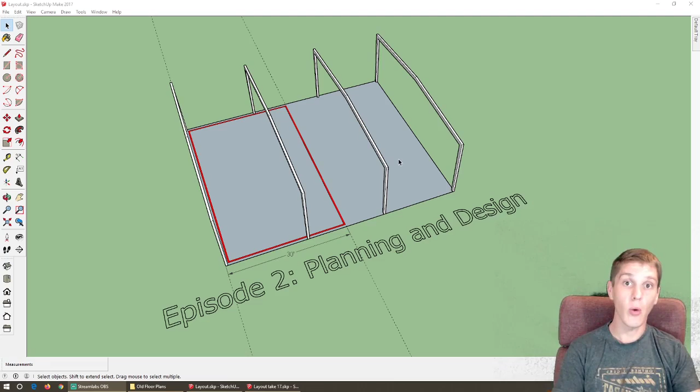That 30-foot width for the hangar becomes important too. I looked at a table of commercially available small planes. For our building, a 50-foot wide building, we are going to put a 42-foot wide hangar door. For a list of planes that would fit in a 42-foot wingspan, the 30-foot depth is big enough for most planes. But we didn't want to get any shorter than 30 feet on the hangar side, because for resale value, the hangar is no longer usable for most people that want to put planes in it. So we had to keep that 30 feet at a minimum for the hangar side.

So what you see here in front of you is our basic building restrictions. We have a 50 by 60 metal building, and inside in red is essentially the exterior walls as I will frame them up inside the building.

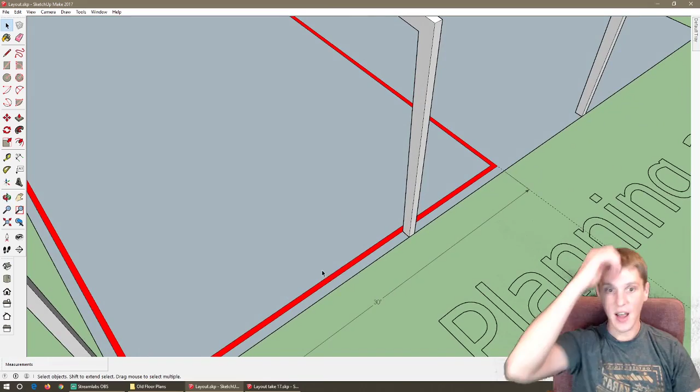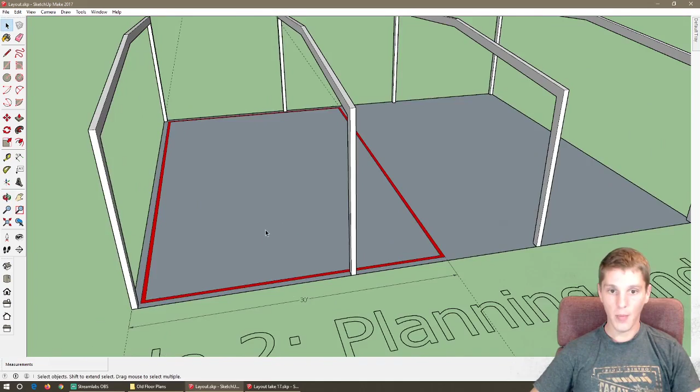Talking to the builder and seeing the designs for the metal building, we need to offset the walls 8 inches from the exterior walls, because that's the depth of the girts. These cartoons of the main columns are not actually to size—they're just there to help you visualize the overall shape of the building. But we can get up to 8 inches from the exterior walls where there are just girts running between these two columns. Now, where these columns are on the wall, I'll end up having to box around them.

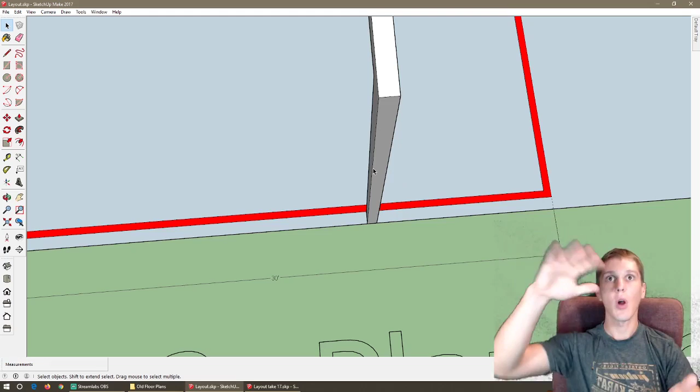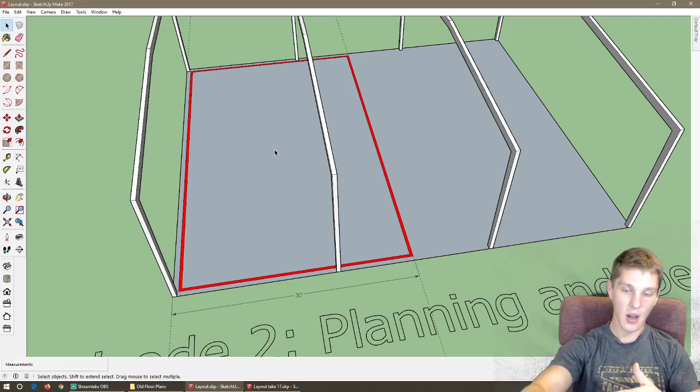With the framing, we'll have to frame in and sheetrock a box to hide that column. I don't show that on any of the plans, but I won't know exactly how big I have to make that box till I'm actually framing in the house, and I can see how far that column extends past my exterior studs as I run them around the outside of that wall.

But anyways, this is the starting point for where we came up with floor plans. Everything had to fit within this red box for us to have a house. So from here, I'm going to roll through some of the floor plans.

I want you to know that the first floor plans I'm going to show you, and I'm going to buzz through them pretty quick, look nothing like the finalized floor plan that we chose. We went through probably 20 different iterations of floor plans, off very wildly different concepts, that evolved as we figured out what we wanted and what we could and could not do.

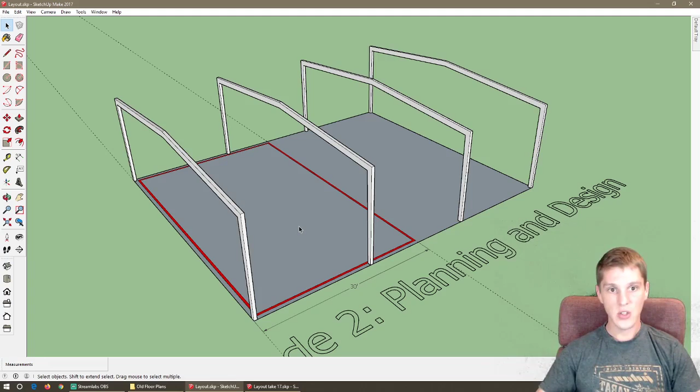So there's a lot of restrictions as far as what I can build, and then there are restrictions for what we wanted out of our house. So I'll walk you through what we did, and I'll show you what we came up with.

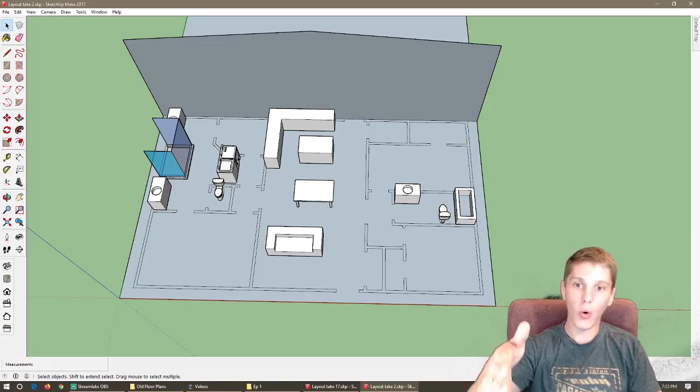Here you can see we finally started trying to visualize what it would look like with these main columns. We were fairly certain this was the layout we were going to go with for a long time. We really were happy with the whole master suite, the walk-through bathroom into the closet with the utility room back here. We thought this was going to be it.

Until at one point we went into our backyard with a 100-foot measuring tape, some spray paint, and some flags, and I actually drew this floor plan out in the lawn and let my wife walk through the house. We came to find that the living space and kitchen was not big enough—there wasn't enough room for the living room, dining room, and kitchen all in that central third of the house.

That's something I'd like to pass on to people doing their own floor plans: you have other options to visualize it. It's easy to sit at a computer and not get a good sense of scale. Going to a park with some flags, or laying the floor plan out in your backyard and walking through it, really helps you visualize how big the house is going to be.

So we were 100% certain for probably a week that this was the floor plan. We were going to do this, but then we actually laid it out on the ground and decided it wasn't big enough, so we decided to try and expand the living space.

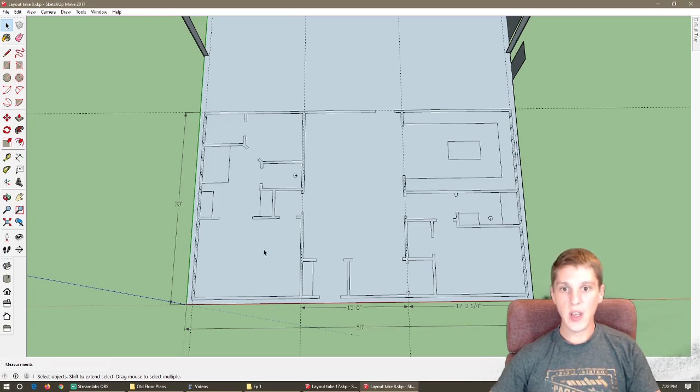So then we decided to enter into the living area so we could have this bedroom here with a kind of cutout. My wife wants a built-in desk, study nook, or office area somewhere in the house, so we did something like that here, keeping this master suite the same as before, with the same U-shaped kitchen layout.

Then finally we had a big brain flash and thought, why do we have to enter from the end wall of the house? If we enter from the side wall instead, we can essentially cut the house in half, with less than 16 feet spanning each way. That makes it real easy to run floor joists for the second floor—they just go all the way across.

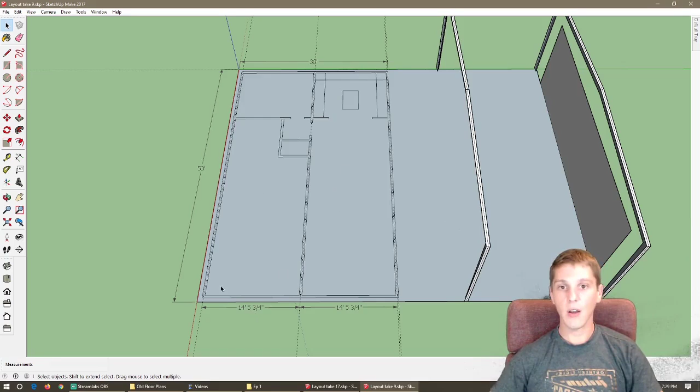We can have this entire area be the living room with the kitchen in the back, and then just carve up this area into 2 bedrooms and 2 bathrooms. Another attempt had this long skinny layout, walking into a large living room with a hallway accessing kitchens, bedrooms, and bathrooms. This ended up not working out—you lose too much square footage to a hallway, so it wasn't an efficient use of space.

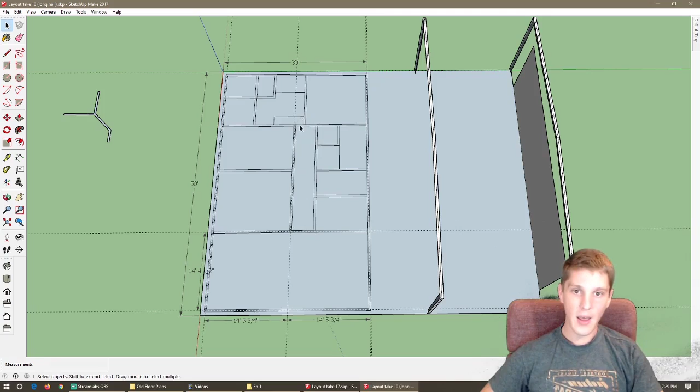This layout was our first attempt at carving this half up, and we refined that idea a little bit.

We moved the bedrooms down here on either side so they could share a hallway and save some space. We changed our mind for a bit, went back to the old way of entering in the end wall, cutting in the kitchen here off the living room. So we tried to tweak this a little more to make sure entering this way was what we wanted, or if entering the other way was what we wanted.

The one thing I did like about this layout was you have some separation between the bedrooms so you don't interfere with each other if you have people coming over. It's just me and my wife, we don't have kids, so this bedroom would end up being her office most of the time because I have an office here. But I did like that.

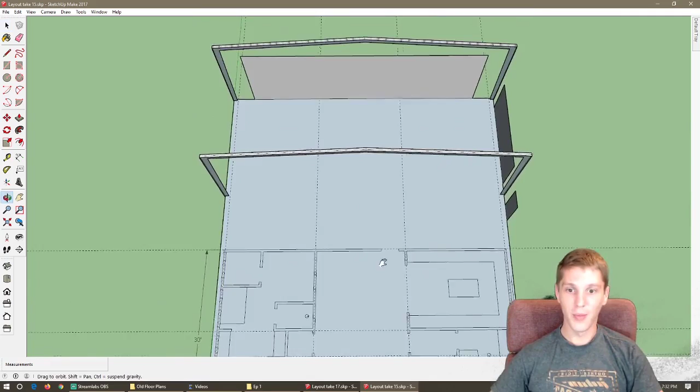We really started tweaking this, and we're getting a lot closer here to where we ended up finally landing. Living space, dining room area all the way through here, and you have your full kitchen in the back, U-shaped counters all the way around, island in the middle.

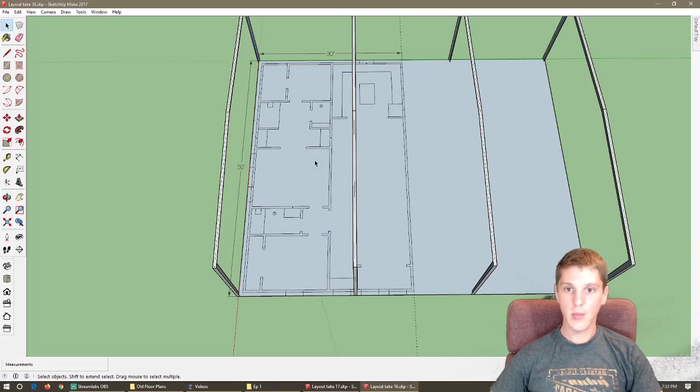You have kind of a shared hallway where you go into a guest bedroom, master bedroom, and for a long time we thought this was it. This was exactly how it was going to be, 100%.

I drew up plumbing diagrams, framing diagrams, sent plumbing diagrams to the builder, and the last thing we did, we made a couple little tweaks like you always will. The only major change we did is we made the walk-in closet on the other side of the master bathroom smaller, and we added a closet here to have a separate his and her closet, and to give some separation from the master bedroom and the guest bathroom. So that was the only real change.

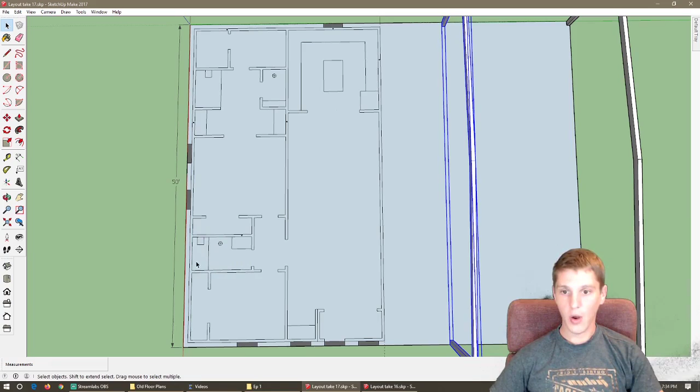Since then, only minor changes have been made to this layout. We've mirrored this bathroom so that the vanity, toilet, and bathtub all drain on this side, and we did that for HVAC reasons - we'll talk about the HVAC here in a second. But this is essentially the layout we have landed on. Okay, so I know I burned through those pretty quick, but you got to realize that as I was making all those floor plans, you constantly have to be thinking about the next step in the build.

You can't just be drawing pictures on a flat sheet of paper. You need to be thinking about how that's going to translate for framing it in, how it's going to translate for your plumbing, running your waste and your plumbing supply, how you're going to run your electrical. Electrical is generally pretty straightforward, but you need to be thinking about these kinds of things beforehand.

One of the major problems we had to think about was the plumbing waste and vent lines, the vent lines primarily, and the HVAC. Now, the major concern I have for the vent lines and HVAC is they usually get run up for a single story home, up into the attic where the vent lines all tie into a main stack, and the main stack runs at the top of your house. The HVAC has all your ductwork that distributes air from a central AC system throughout the house.

Now, we wanted to be able to add a second floor to the house at some time, so I wanted to be able to fit all my utilities within the floor joists of the second floor. So a lot of this, when we were talking about floor plans, we were constantly thinking about what things would look like in the future.

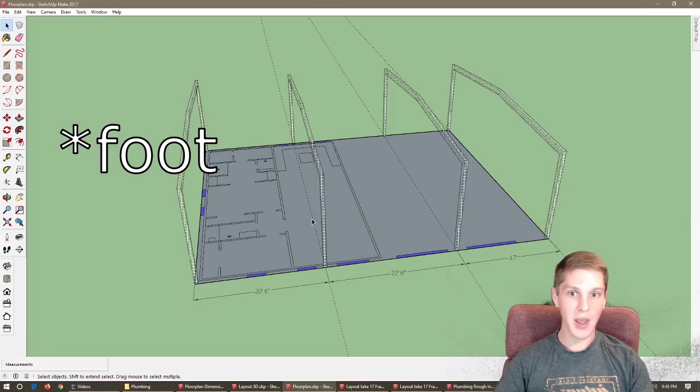So I mentioned it briefly - a big thing you need to be thinking about is your joist spans for when you put your second floor on. With a 2x12, generally a 16-foot span is about as far as you want to take it. You can go a little further if you put them on tighter centers than 16-inch centers, but generally about a 16-foot span. Even better would be to use all 2x8 floor joists if you could keep them on a 12-foot span or shorter. You can go a little longer than 12 foot, but once again, you've got to keep them on a tighter spacing than 16-inch spacing. So you've got to be thinking about all those things while you're doing your floor plan.

One of the main things no one told me that I wish I had known earlier in the planning layout is that if you work with your metal building guys, they can actually move where you put your main columns in your building. We had designed most of our layouts on the assumption that these were going to be spaced evenly every 20 feet.

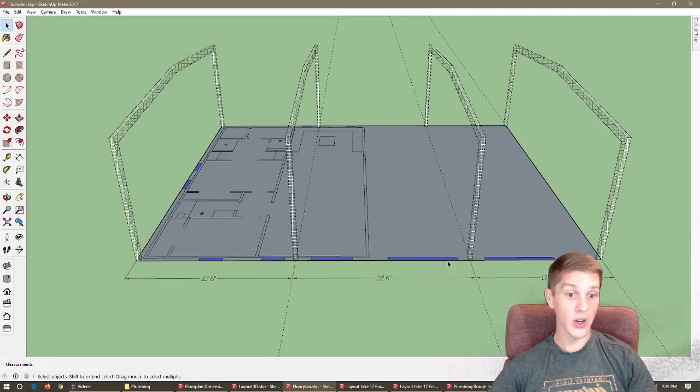You can see in our final plan, this bay is actually down to 17 feet, and then we have a longer span in the middle and a little bit longer span here. The reason we did that was to allow us to install 9-foot garage doors as opposed to 8-foot garage doors. To give yourself a gap from the living space to the garage door, and then a gap from the garage door to the beam, we had to move this over in order to fit 9-foot garage doors. I did have to work quite a bit with the metal building manufacturer about where I was able to fit windows and doors.

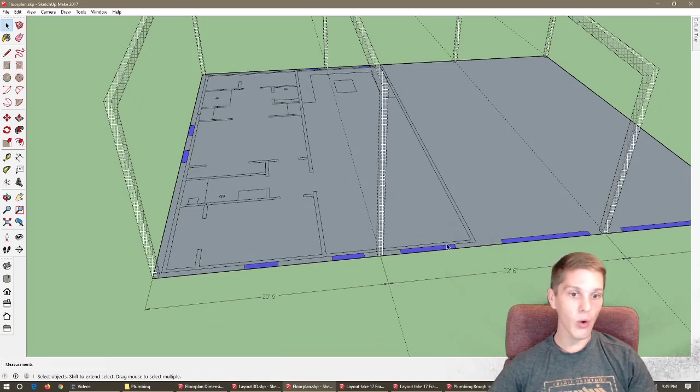We had originally thought we were going to be able to put a window, a door, and a window, but we just didn't have the room with the way this main column laid out. So we ended up going with a door with side lights - a main normal 36-inch door, and on either side of it narrow windows that go up beside the door.

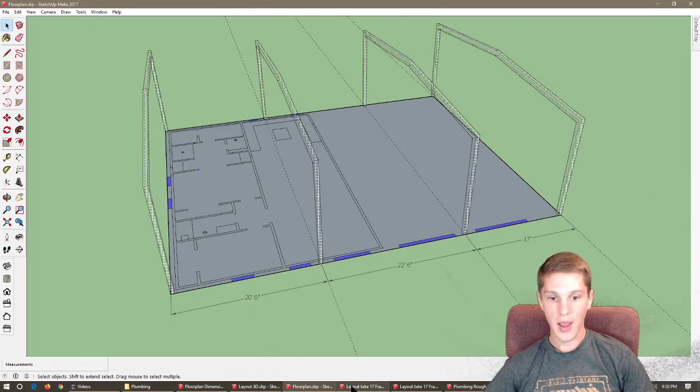So this was our floor plan, where I've highlighted the windows and doors in blue, and you can see that is the plan for the windows and doors as they line up on the outside. The metal building builder will actually install these windows as part of erecting the building, and it'll be my responsibility to make sure the windows are in the right spot and that they all line up with the rooms appropriately.

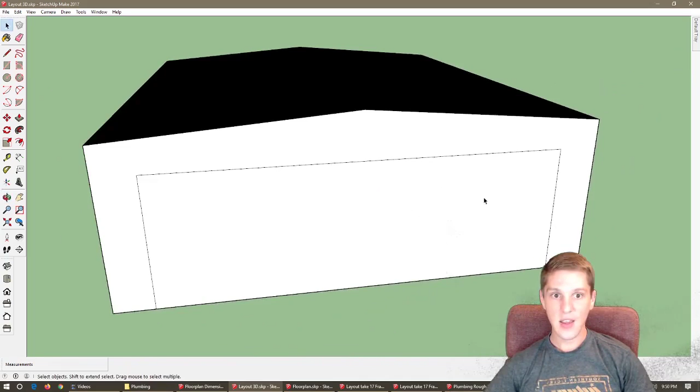So this is the planned exterior of the house. Once again, everything is on a budget, so we don't get everything we want. We do plan to come back at a later date and add a wraparound porch that comes around here, but for right now we are not doing that, just to save money.

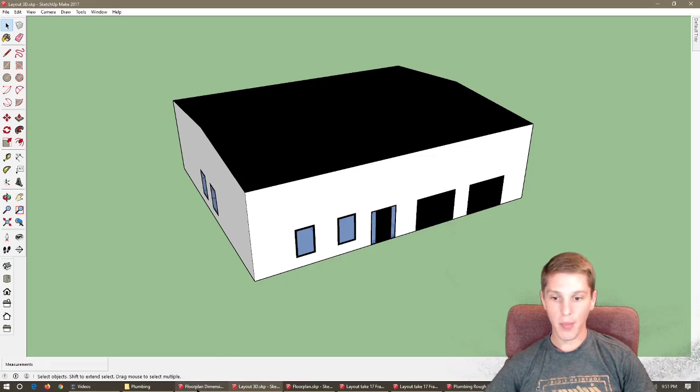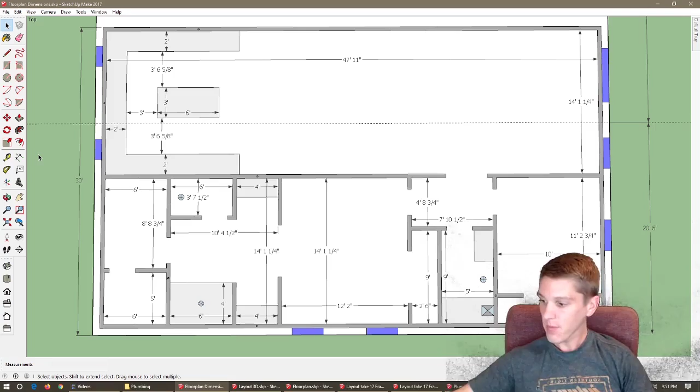Okay, so we got a floor plan that we liked, and we think to ourselves that we've been planning about framing the whole time, that we know exactly how we're going to frame it. Well, everything kind of changes once you actually try and frame it. Having never framed a whole house from the ground up before, and having at least some working knowledge of this program, I decided I was going to try and do it in the virtual world first.

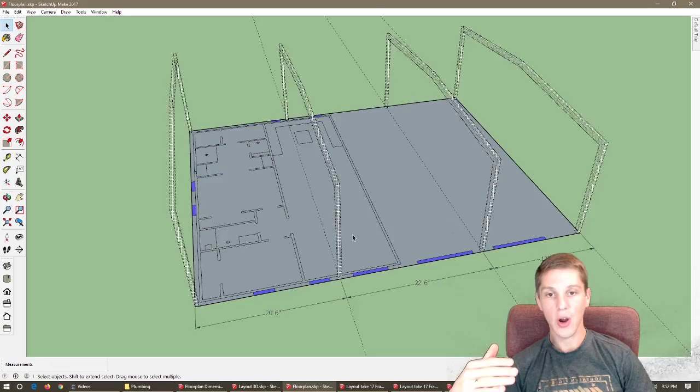So this is my layout for framing, and there's going to be a couple things here that you'll notice. First of all, I think the most obvious thing is that I'm not running floor joists for the second floor this way like I talked about. We actually decided that for running electrical and running plumbing supply and the vent lines for the plumbing waste, it would be better for us to have all of our floor joists for the second floor running in this direction, long ways along the living space of the house.

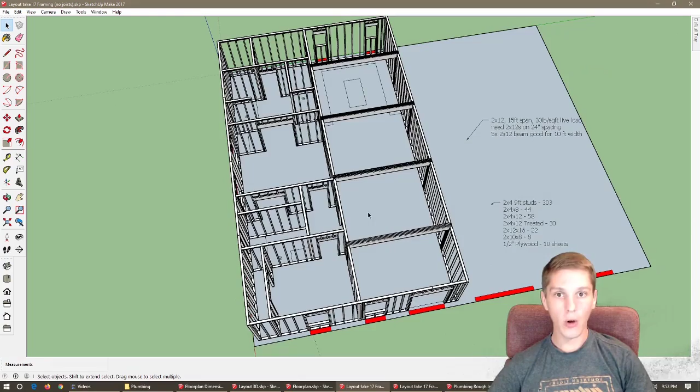That allows us to run plumbing vent lines from one end of the house all the way to the other through a continuous channel way, and not have to cut a bunch of holes through the floor joists on the second floor. The reason that's important, I'll show y'all here in a second when we get to the plumbing. It also allows all the power to be pulled in on this side of the house, giving an easy pathway to pull electrical cables. All the water will come into this side of the house, so it's an easy pathway to pull water lines, and just easy access for running utilities between the first and second floor if we make all of these run this way.

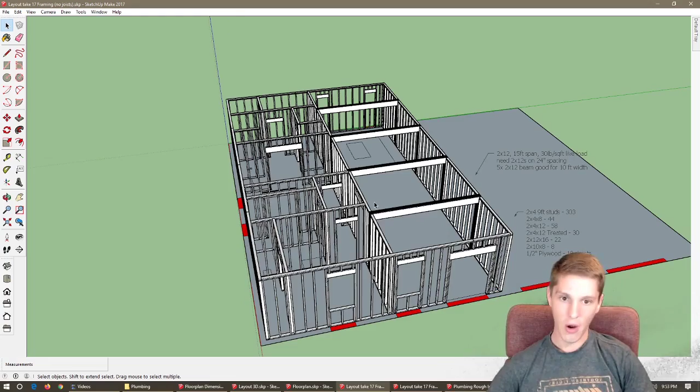As opposed to running them all this way, which would mean drilling holes through all those joists and worrying about structural integrity, how big of a hole you can drill, how many holes you can drill, all that kind of stuff, we decided to get around that by adding these 4 large beams in the living space.

Each of these beams is comprised of 5 2x12s that run all the way across. On this span, which is a little less than 15 feet, I looked it up in a span table: a 2x12 in a 30 pound per square foot live load is good for 24-inch centers. So I figured if it's good for a 2-foot center, if I stack 5 together, they should be good for 5 2-foot or 10-foot spans.

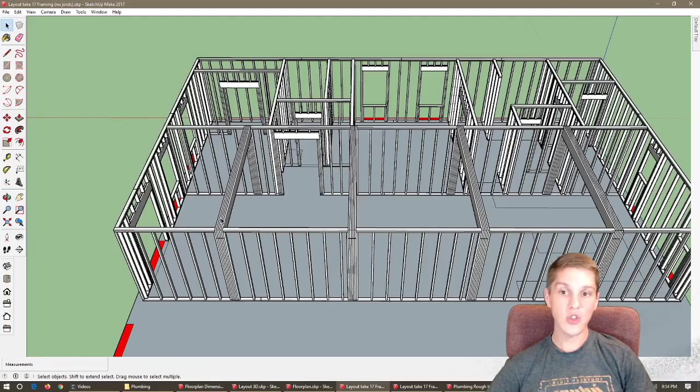So none of these spans that this supports is longer than 10 feet. And then we'll run 2x8 joists this way across the entire house. That's the plan for how we're going to do it.

I had all the headers sized one size bigger than the header span tables recommend, so I've over-engineered that. I also did it because I plan on doing all my joists with 2x8s, and I'm going to have a bunch of 2x12s anyway, so I essentially sized everything based off of 2x8s and 2x12s for my headers over doors and windows.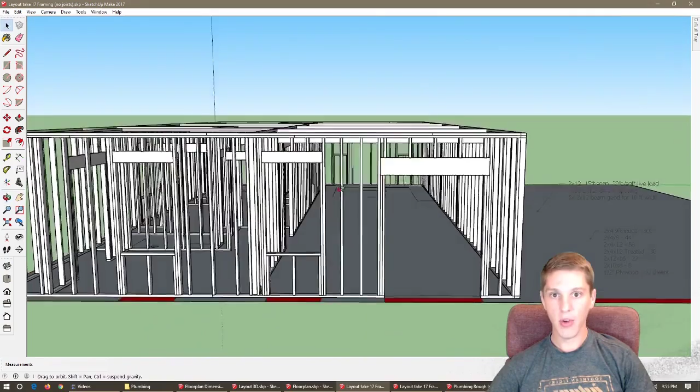Once again, framing in all your doors, looking up in tables when you need 2 jack studs, how many jack studs you need, cripple placement, and here is essentially my framing plan.

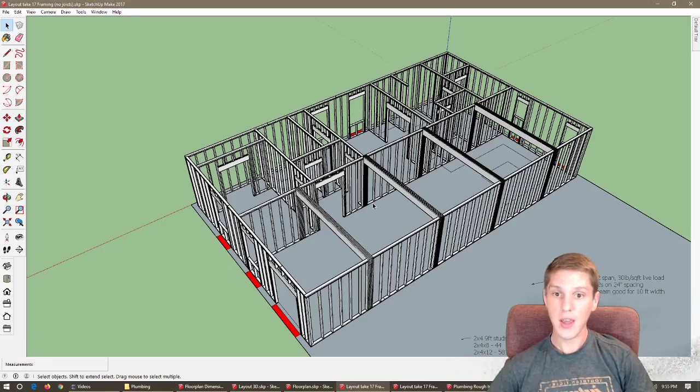Another small detail I didn't realize until I watched a lot more YouTube videos on it, and something I want to remind you, if you're not used to it like me, is you need to plan on every corner making sure you have something for sheetrock to screw into along the corner. So every corner of every room, you want 2 faces where you can screw sheetrock into.

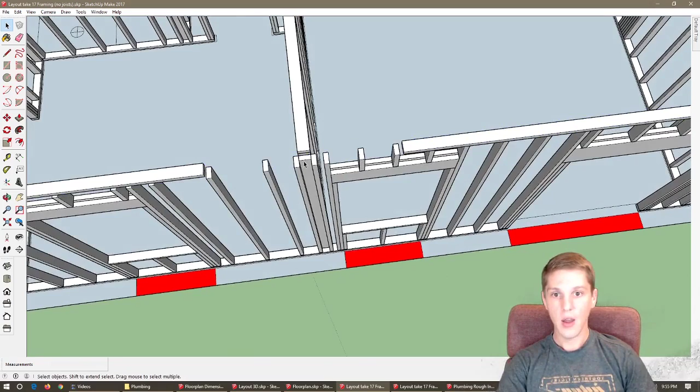You also want to make sure where your walls tie together, like in a T here, you have some sort of way to tie your walls together. In this instance, I have 2 studs, one on this wall and one on this wall, that I'll use to tie those 2 walls together.

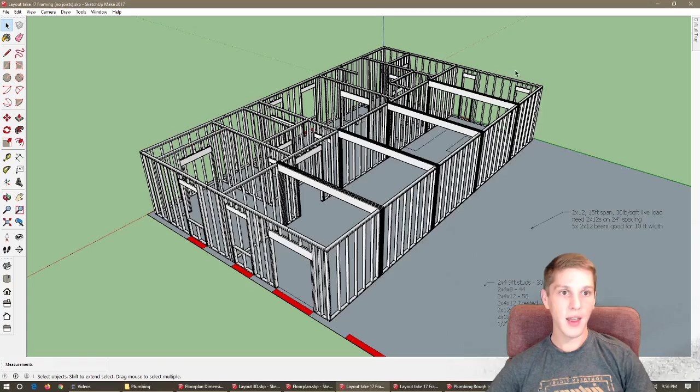Based off of this flooring plan, I have no spans in any location longer than 12 feet other than across the master bedroom.

So when I went to lay out my floor joists, I just have them color coded for the length that they need to be, so when I go to order lumber I know how many 2x8 by 12s, how many 2x8 by 8s, how many 2x8 by 10s, and how many 2x8 by 14s I need.

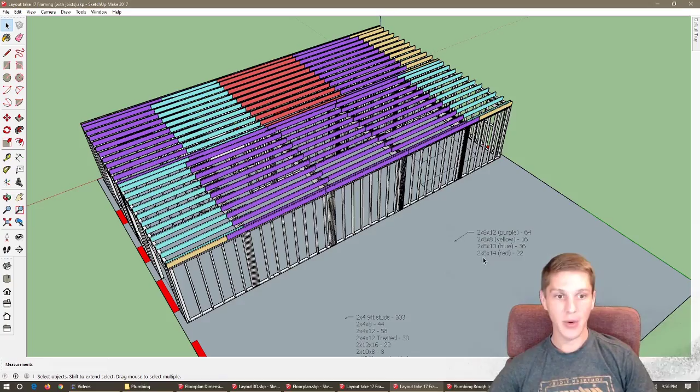The only location where I have a span longer than 12 feet, which is what you're good for at 16-inch centers with 2x8s, is across the master.

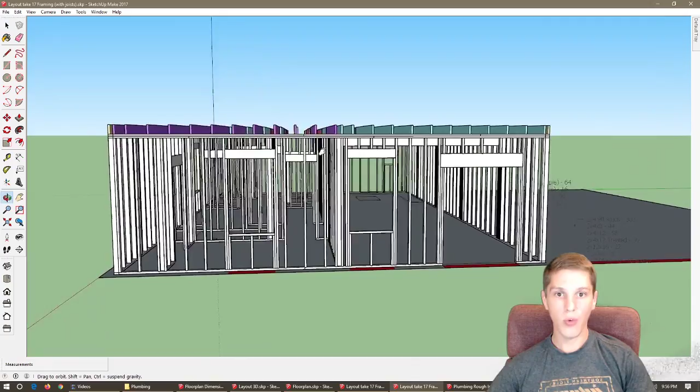So what I did is decide to double up all these studs here to still allow solid pathways all the way through. So when you look at this, you kind of understand what we were going for by putting those main beams in the living room.

Now we have easy access ports to put utilities through without having to drill holes, except maybe a hole once or twice just to jump over between gaps. And then we will subfloor the whole upstairs with 3/4 inch plywood.

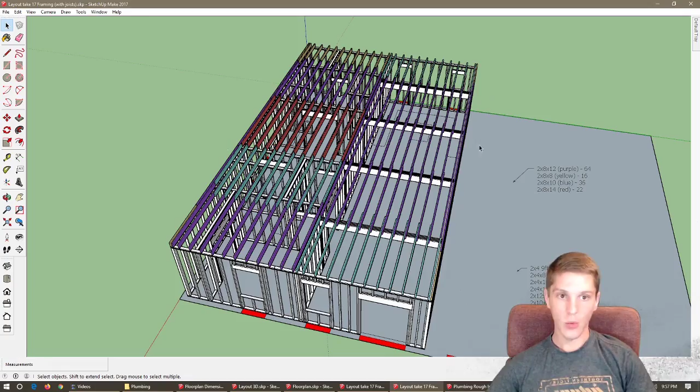We're thinking about where our plumbing is going to be. So your plumbing, you're going to have a main drain line, main waste line going out to the septic that everything ties back into. And where is the best place to run that in this house?

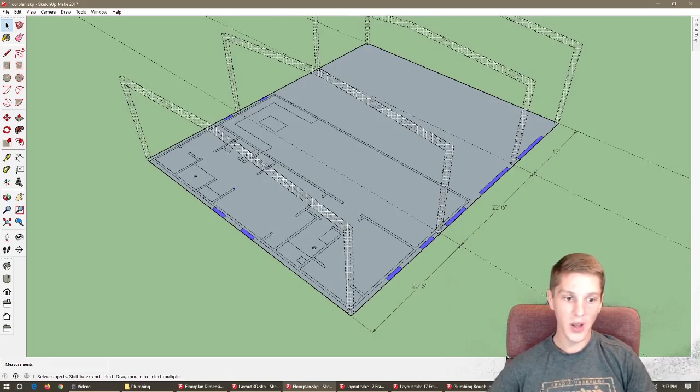I haven't drawn a full-blown 3D one for this floor plan yet, but this is an older one I drew just to talk to the plumber about, and we're looking at doing something kind of like this. Now this bathroom has since been mirrored, so you have to put it over onto this wall, but essentially the layout is the same.

You have your main drain line coming down through the center of the house. You've got your main vent stack, which will come up the front of the house, turn and follow the roof line up, and poke out towards the top of the roof, just so you don't smell all that sewer gas here by the front door.

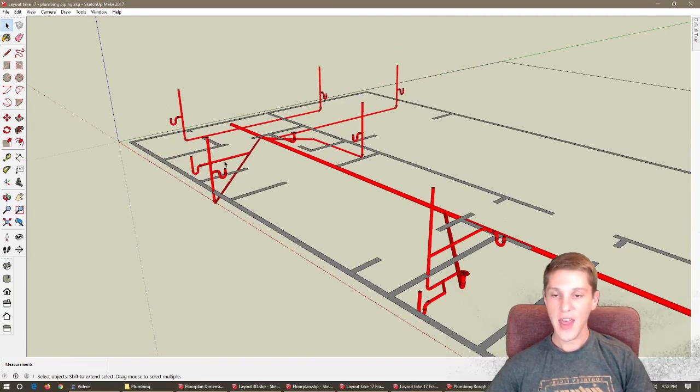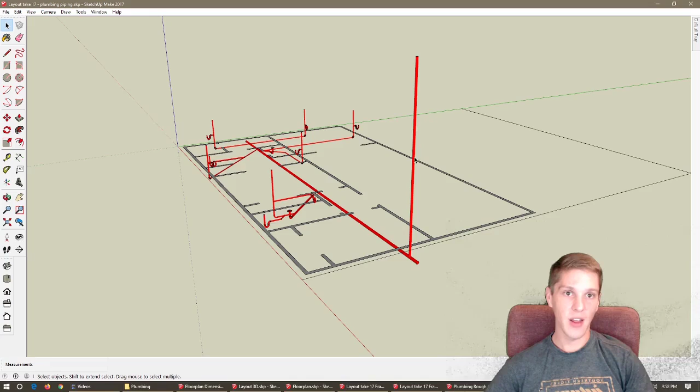And all of your drains for every bathroom sink or everything has a vent line that all runs up and has to tie back into some main vent line. So everything has to be vented. And if you can make things run north-south, because my main drain line runs north-south, then if I can make all my vent lines run north-south, it makes it easier to tie them into my main stack. That was a big consideration for why we went with this layout.

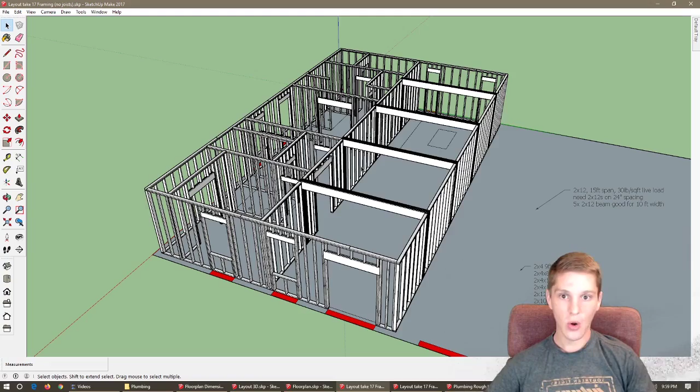The last piece of the puzzle is going to be the HVAC. Me and my wife have decided for this house that we're going to go with a 5-zone mini split system. In the main living room kitchen area we'll have 2 mini splits rated much larger than this space, then a mini split in each of the bedrooms, and one that works in this bathroom, utility room, closet area.

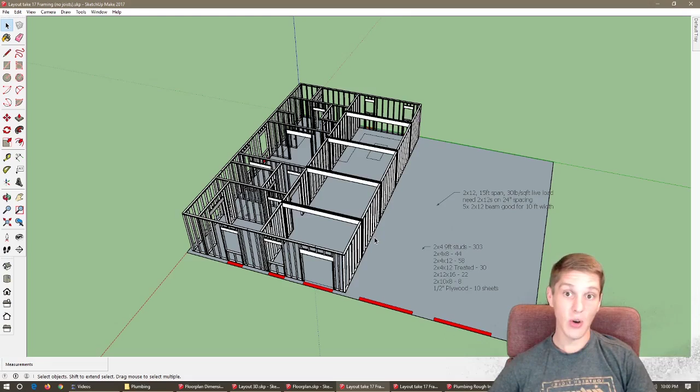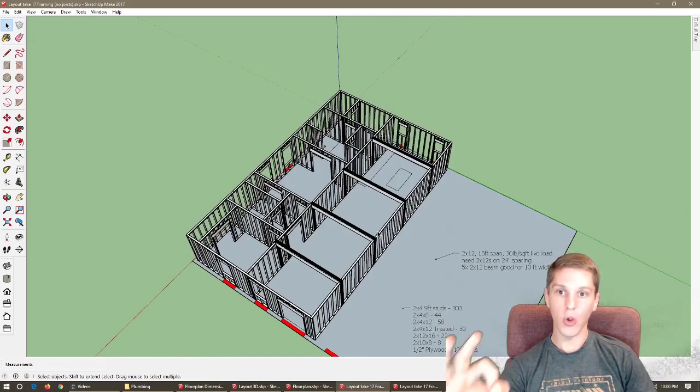The mini splits have a lot of advantages. They're significantly cheaper, they're easier to install. I've watched some videos and believe I can install them myself. All I'll have to run through the floor joists to the second floor will be refrigerant lines. They'll have a single condenser compressor that they all run to, probably out here, so all I have to run is small lines. I won't have to run any ductwork because the mini splits draw air, cool it, and release it back into the same space.

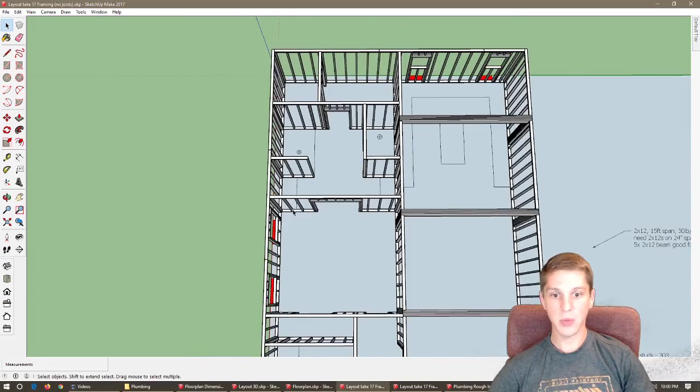The only thing you have to plan for when you run your mini splits is how you're going to drain, because each unit has a drain for the condensation. That's why we decided to flip this bathroom. If I hang a mini split on this wall, I can drain into this drain. I have sinks here and here that I can access for the mini split in the master. I have a sink in the shop on this wall that I can access for mini splits in the living room. And I have the drains in the bathroom for this mini split here. So we have easy enough locations to drain the HVAC systems into to hang the mini splits.

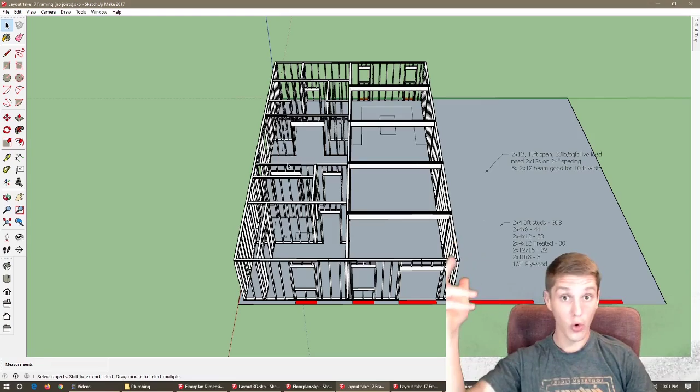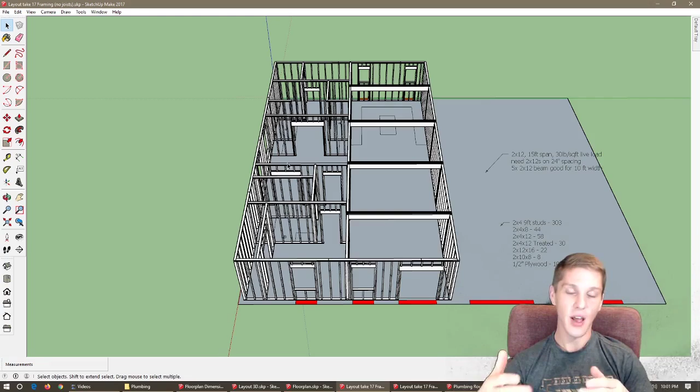That keeps us from having to install an air mover, which takes up room on the second floor, which I'd have to build walls and hide. I'd have to build a utility closet upstairs to put that air mover in. We'd have to have taller floors to run anything but like 5-inch vents with 2x8 floor joists. So it really alleviates how complex installing a central AC system can be.

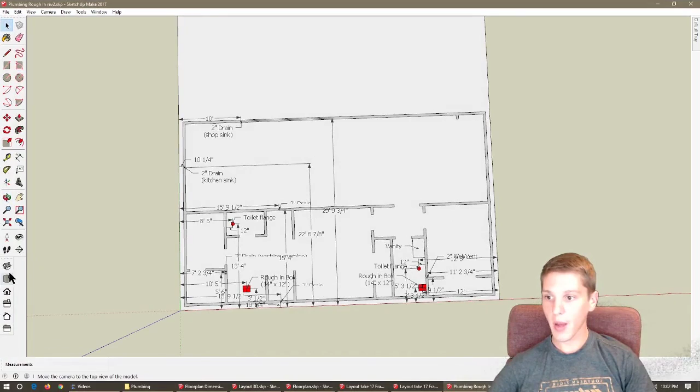And this is kind of where we are today. So the last thing I had to do for the builder, who's planning on breaking ground and doing the plumbing rough-in next week, is he wanted a diagram of where all the rough-in locations are going to be. So I made this for him and sent it to the builder yesterday. This is the locations of where I want all the vents, or the drains, to stub up through the slab.

Essentially everything above the slab I'll do myself. All the vent lines, all the plumbing supply, all the electrical, all the HVAC, all the framing, I believe I can do. Now I understand I'm going to run into problems because it's something I've never done before, but I think I can handle it. I've been growing to believe that you can do anything you put your mind to, so I'm going to put my mind to this one and make this house the best I can.

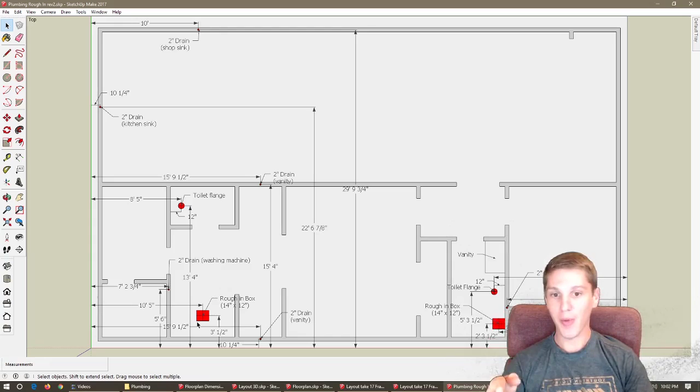So that's kind of where we're at today. This is the shape of the house that I hope it to be in about a year and a half from now. The next video should hopefully be me out on site. I'm going to be going out and measuring all the drain placements before they pour the slab, inspecting the plumbing rough-in next week, and then hopefully they'll pour the slab and start erecting the building.